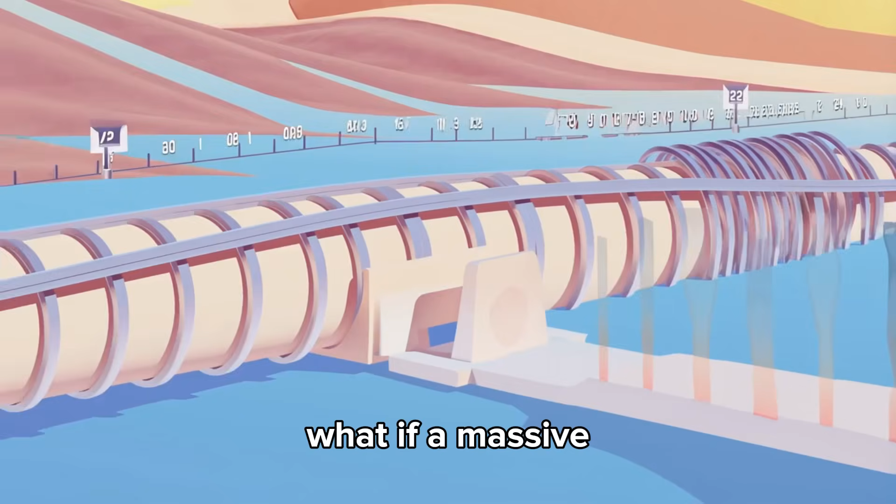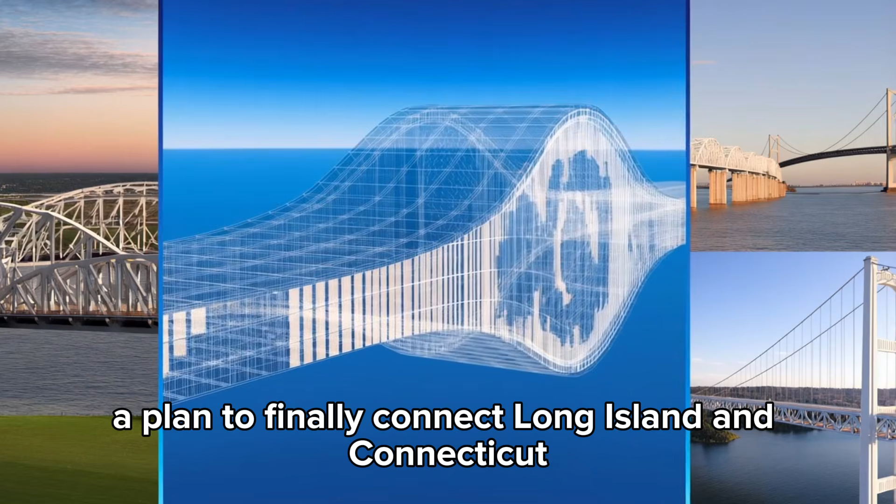What if a massive, $55 billion megaproject could bridge that gap in just 15 minutes? We are talking about one of the most ambitious, controversial, and expensive infrastructure dreams in American history. A plan to finally connect Long Island and Connecticut with a masterwork of engineering that would dwarf almost any other bridge or tunnel on the planet.

This isn't just a local road project. This is a battle of logistics, gargantuan budgets, and environmental high stakes that has been simmering for nearly a century. Today we are diving deep into the blueprints, the massive engineering hurdles, and the political firestorm surrounding New York's $55 billion plan to change the face of the Northeast forever.

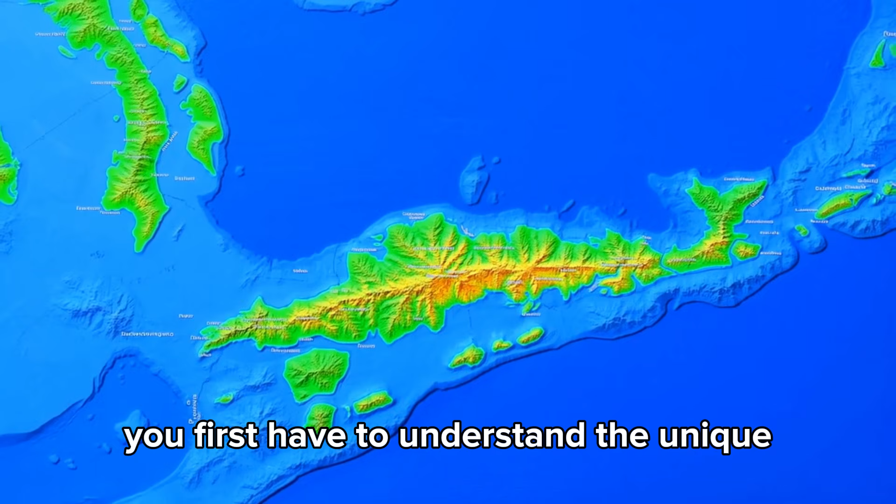To understand why this project is such a big deal, you first have to understand the unique geographical trap that is Long Island. With over 8 million residents, if Long Island were its own state, it would be the 13th most populous in the country. Yet it operates like a giant cul-de-sac. Every single piece of bread, every gallon of fuel, and every commuter trying to leave the island toward the north or east has to funnel through the bottlenecks of New York City. This creates a logistical nightmare that costs billions in lost productivity and wasted fuel every single year.

For decades, planners have looked at the Long Island Sound and seen a massive missed opportunity. They see a gap that, if closed, would bypass the entire metropolitan nightmare and create a direct corridor for trade and travel between the Mid-Atlantic and New England. The $55 billion figure isn't just a placeholder. It represents the estimated cost of a project so complex it would require technologies that push the boundaries of modern civil engineering.

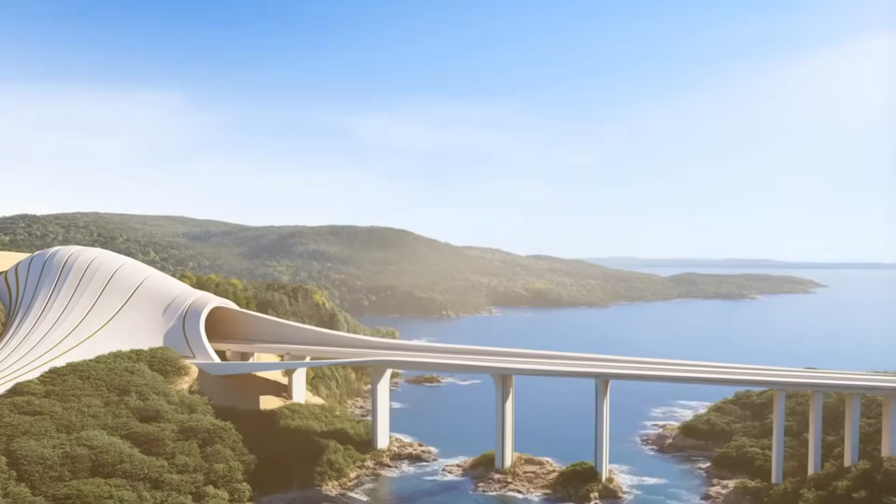There have been several proposed routes over the years, but the most prominent ones involve connecting Oyster Bay on Long Island to Rye in Westchester, or the even more ambitious eastern crossing from Wading River to New Haven. We aren't just talking about a simple bridge, because the Long Island Sound is a vital waterway for shipping and a sensitive ecological zone. A traditional bridge isn't always the best answer. A combination of massive suspension bridges and deep-sea tunnels, similar to the Chesapeake Bay Bridge Tunnel, but on a much larger and more technologically advanced scale.

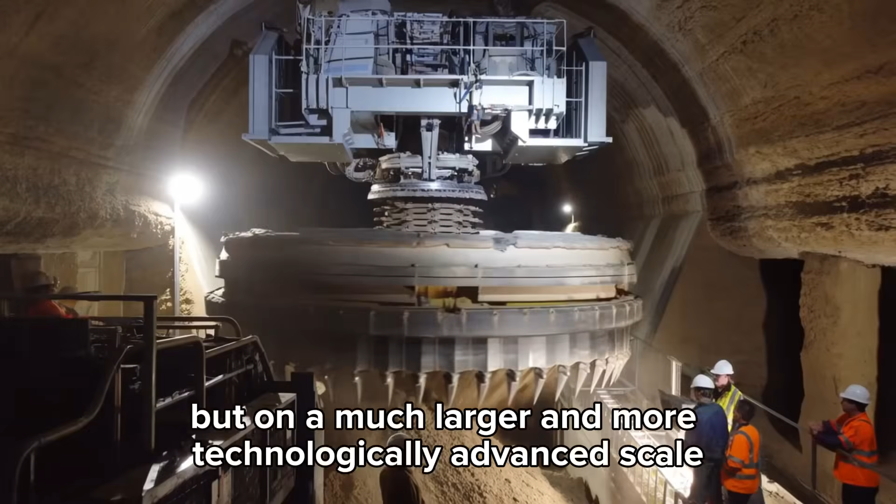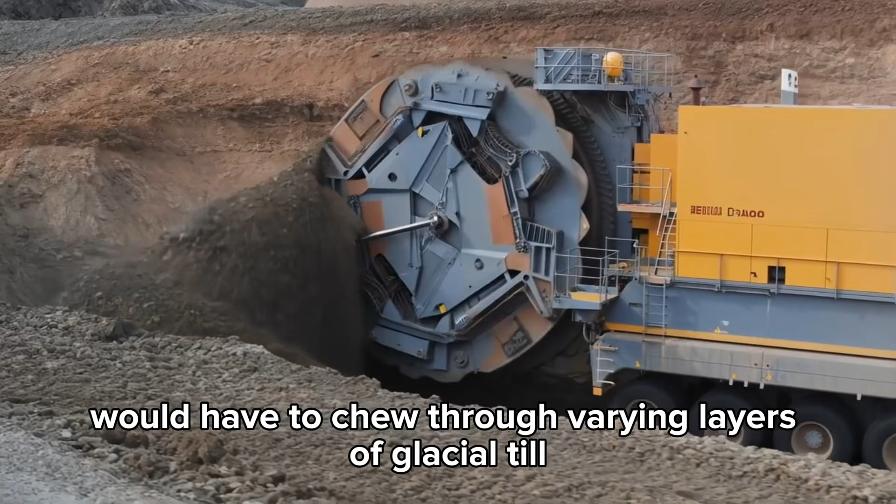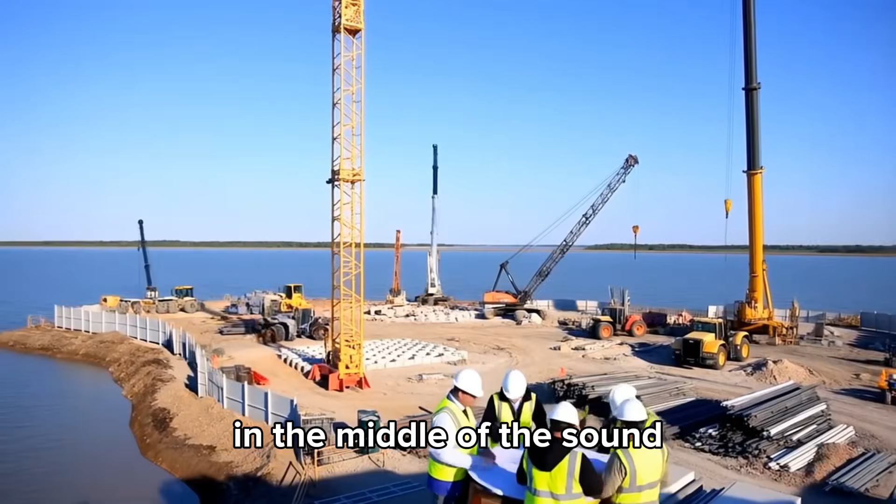This presents massive challenges for ventilation, fire safety, and emergency evacuation. Engineers would need to construct artificial islands in the middle of the sound to serve as ventilation shafts and staging areas, creating entirely new landmasses in the process.

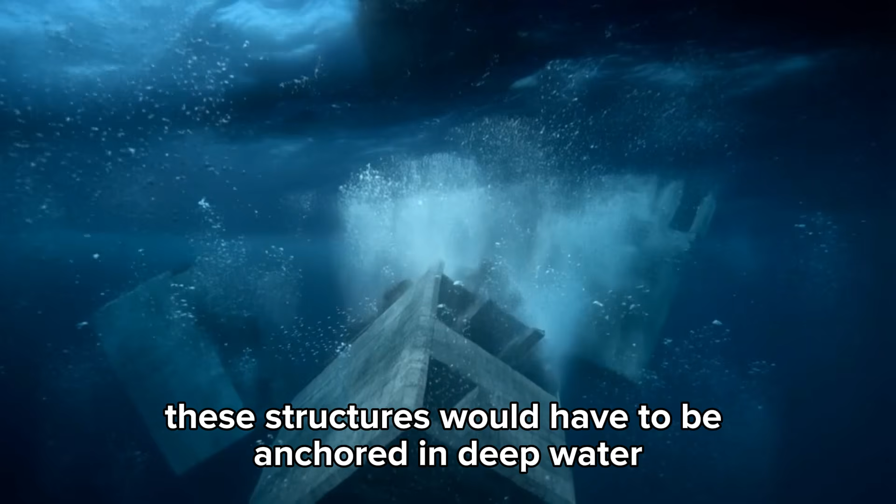The bridge sections would be equally staggering. To allow for the passage of massive cargo ships and military vessels, the spans would need to be incredibly high and wide. We are talking about suspension towers that could rival the height of New York City skyscrapers. These structures would have to be anchored in deep water, requiring massive caissons to be sunk into the seabed, a process that is both incredibly expensive and technically risky. The environmental impact of placing these massive pillars in a tidal estuary is one of the primary reasons the project has faced such fierce opposition from conservation groups.

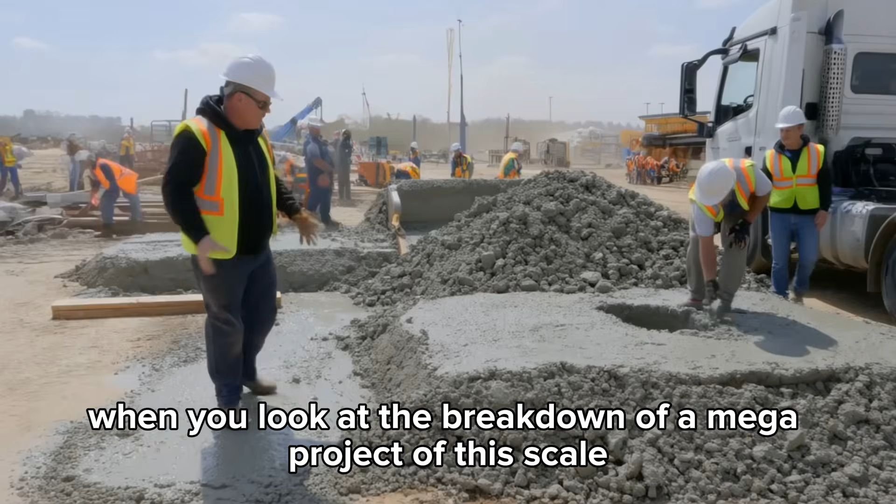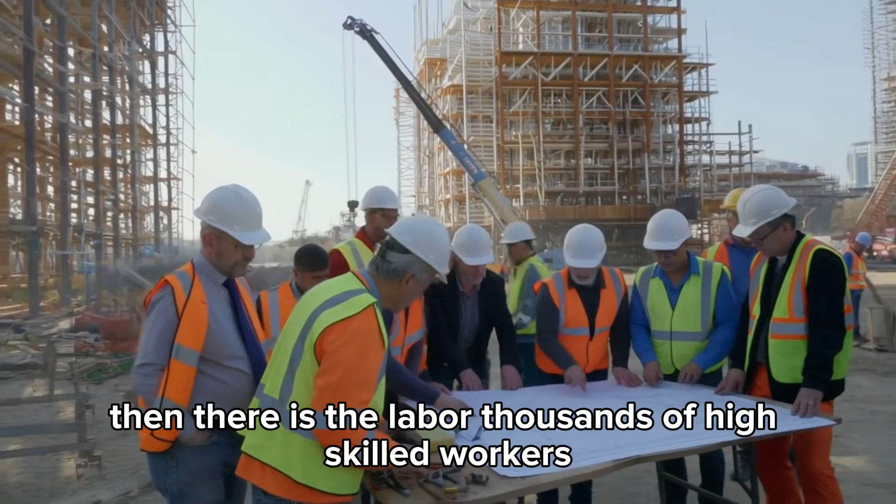But why $55 billion? When you look at the breakdown of a megaproject of this scale, the costs start to spiral quickly. First, you have the raw materials, millions of tons of high-performance concrete and specialized structural steel. Then there is the labor, thousands of high-skilled workers, engineers, and divers working in hazardous conditions for over a decade. But a huge chunk of that budget actually goes toward land acquisition and environmental mitigation. Long Island and coastal Connecticut are home to some of the most expensive real estate in the world.

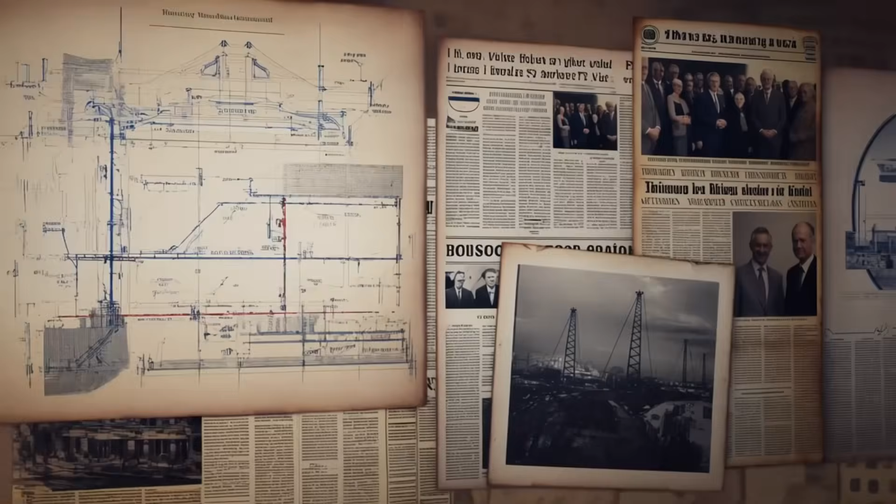Buying the rights of way to connect the bridge or tunnel to existing highways means moving through wealthy suburbs where a single acre can cost millions. The political history of this project is a roller coaster of grand visions and crushing defeats.

The dream started in earnest with Robert Moses, the legendary and polarizing master builder of New York. Moses wanted a bridge across the Sound to complete his vision of an interconnected highway system. In the 1960s and 70s, he pushed hard for an Oyster Bay Rye Bridge. He saw it as the final piece of the puzzle.

However, he met his match in a coalition of local residents and environmentalists who didn't want a massive highway cutting through their quiet, wealthy neighborhoods. This was one of the few times Moses actually lost a fight, and the project was shelved for decades. Fast forward to the 21st century, and the traffic problem has only worsened.

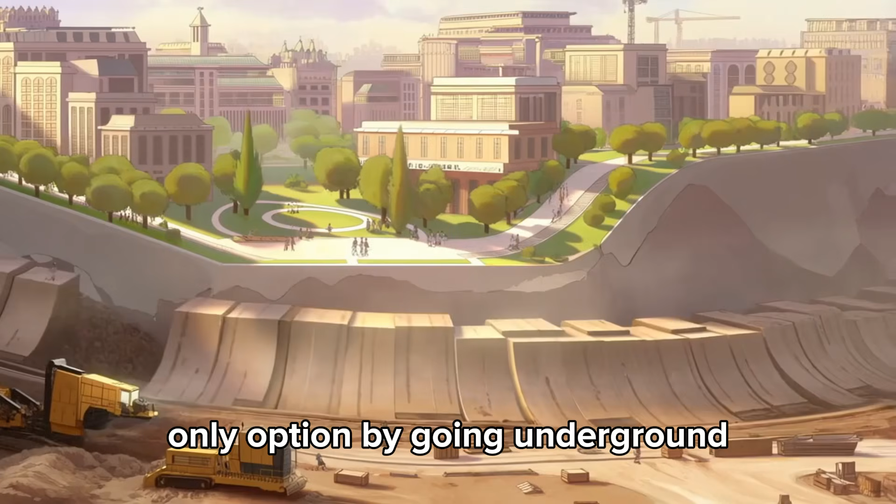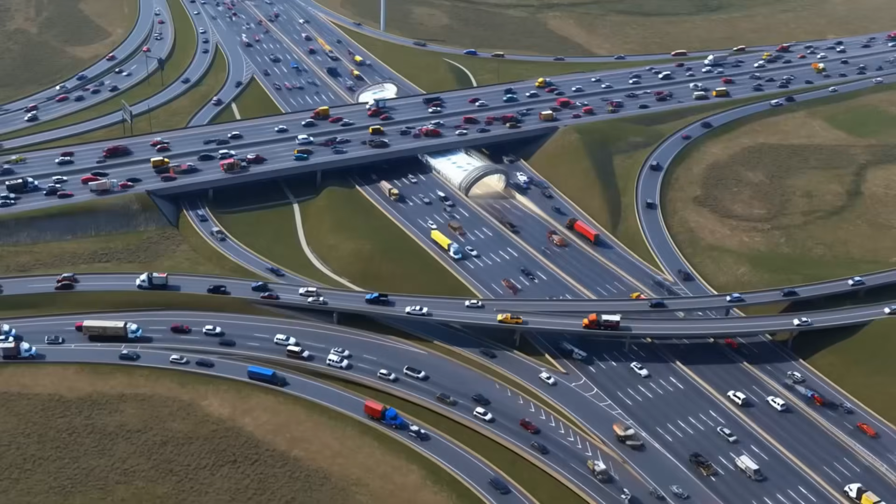The idea was revived by former Governor Andrew Cuomo, who commissioned new studies to look at the feasibility of a tunnel-only option. By going underground, planners hoped to avoid the aesthetic and noise complaints that killed the bridge proposals of the past. A tunnel would effectively be invisible to the residents on the shores, appearing only as a portal several miles inland near major existing highways like the Long Island Expressway and I-95.

But the price tag for a tunnel is nearly double that of a bridge, leading us to that astronomical $55 billion estimate. Let's look at the logistical benefits. If this link were built, it would transform the entire regional economy.

Currently, a truck traveling from a warehouse in central Long Island to a store in Boston has to fight through the Cross Bronx Expressway, arguably the most congested road in America. With a Sound crossing, that truck could bypass New York City entirely, shaving hours off the trip. This would lead to lower shipping costs, fresher produce, and a more resilient supply chain.

For the millions of people living on the island, it would mean the freedom to travel north without checking a traffic app 3 hours in advance. It would turn Long Island from a dead end into a gateway. However, the criticisms are just as massive as the project itself.

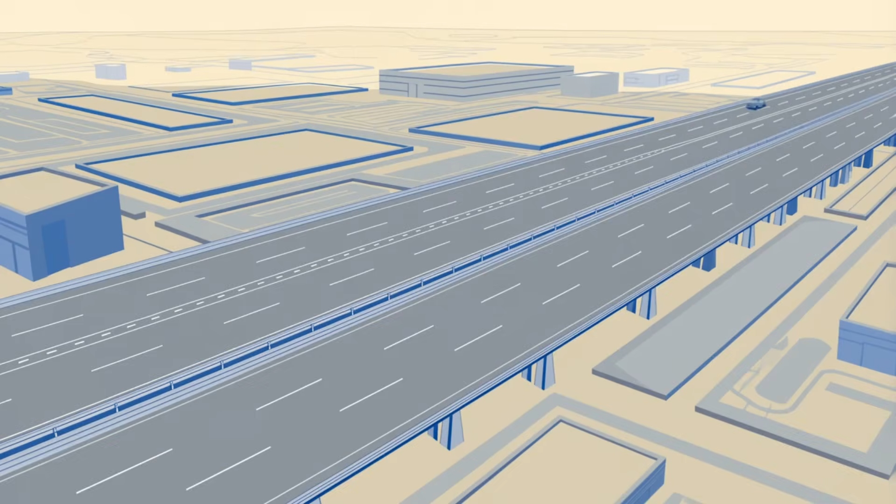Beyond the cost, many urban planners argue that building more highways only leads to induced demand. This is the idea that if you build more lanes, more people will choose to drive. And within a few years, the new bridge will be just as congested as the old routes.

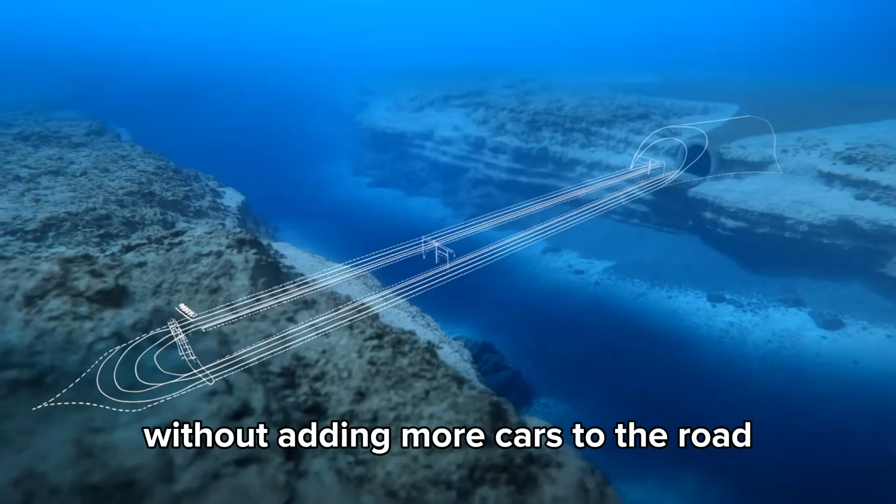Critics suggest that the $55 billion would be better spent on massive upgrades to the Long Island Railroad and the Metro North, creating a high-speed rail link that could move people across the Sound without adding more cars to the road. There has even been talk of a rail-only tunnel, which would be smaller and cheaper, but would still bridge the geographical gap. Then there is the environmental perspective.

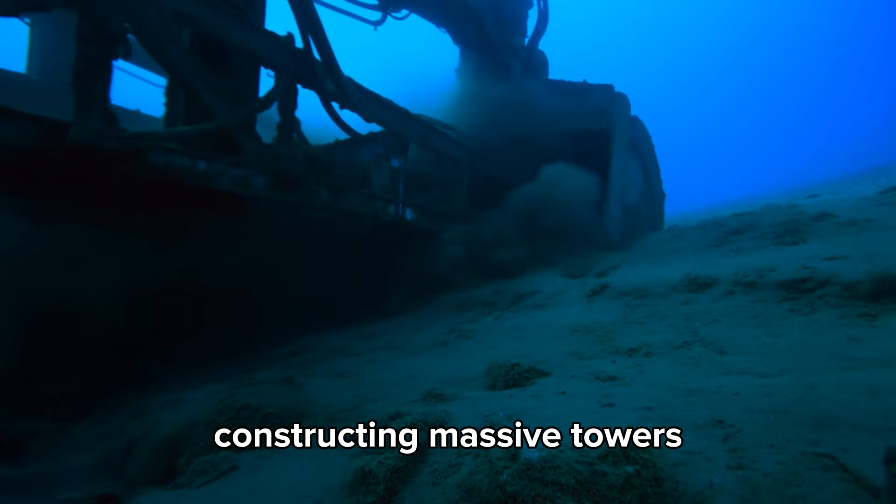The Long Island Sound is a unique ecosystem, home to diverse marine life and vital for local fishing and recreation. Constructing massive towers or digging deep tunnels would stir up decades of sediment, potentially releasing pollutants into the water column. The artificial islands required for ventilation could alter tidal currents and impact the migration patterns of fish and birds.

For many who live on the Sound, the water isn't just a barrier to be crossed, it's a sanctuary to be protected. This cultural clash between those who want progress and those who want preservation is the core reason the project remains in a state of perpetual planning.

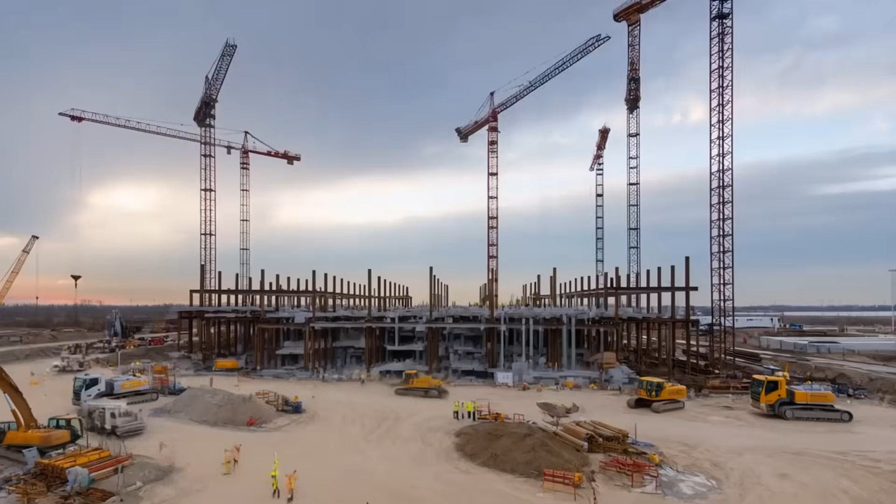But imagine for a moment that the project gets the green light. The construction phase would be one of the greatest engineering spectacles on Earth. We would see a fleet of specialized barges, floating factories capable of mixing concrete on-site, and giant cranes that can lift entire bridge sections into place.

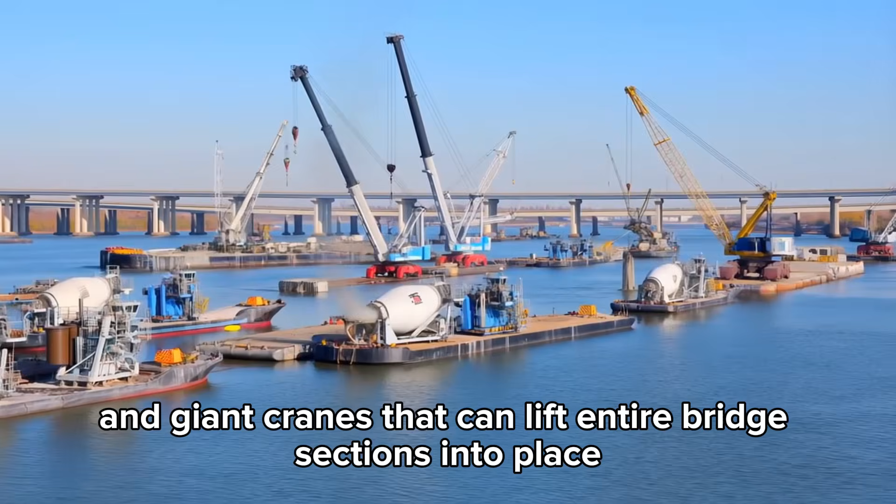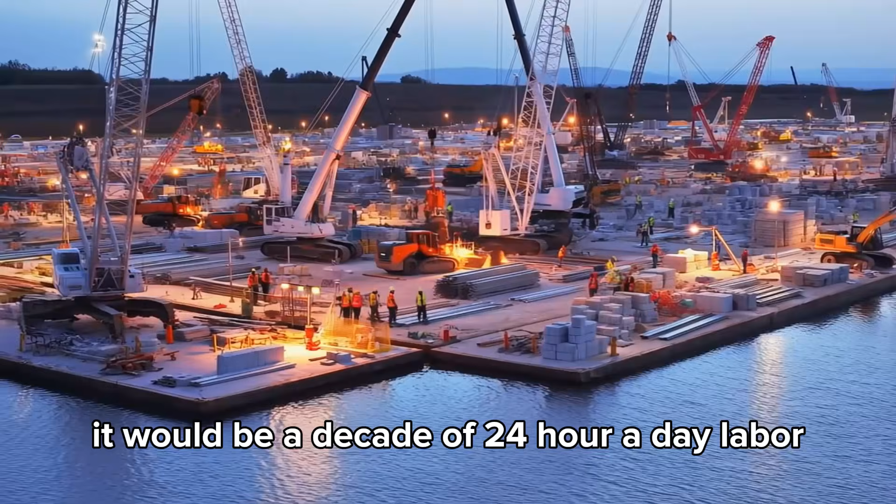The tunnel boring machines would be custom-built monsters, designed specifically for the unique geology of the Sound. It would be a decade of 24-hour-a-day labor, creating a temporary city of workers and industrial equipment on the water. The project would also require a massive redesign of the regional power grid.

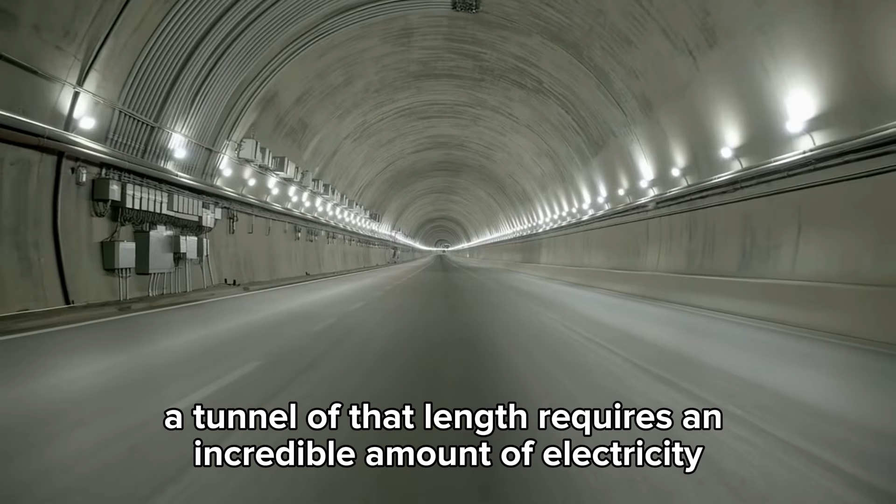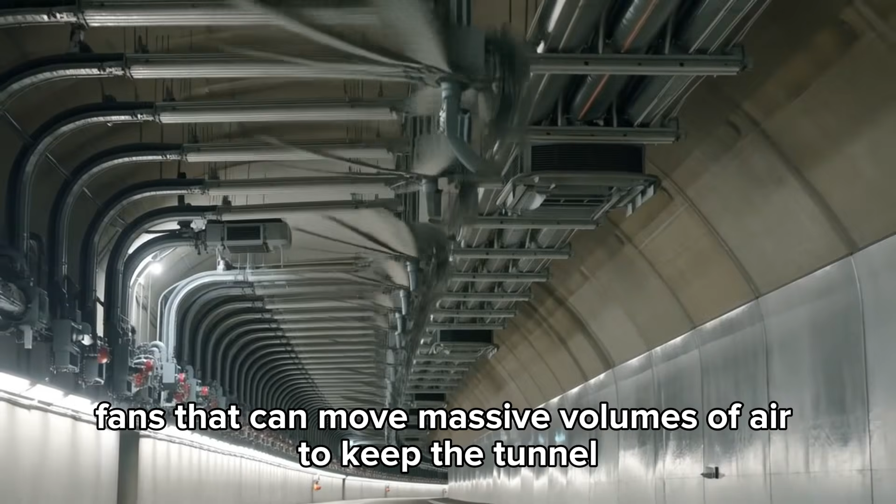A tunnel of that length requires an incredible amount of electricity for lighting, pumping systems to remove water, and most importantly, ventilation fans that can move massive volumes of air to keep the tunnel safe for drivers. Designers would likely need to build dedicated power substations just to handle the load of the crossing.

There is even a proposal to include high-voltage transmission lines and fiber-optic cables within the bridge or tunnel structure, making it a vital piece of energy and data infrastructure as well as a road.

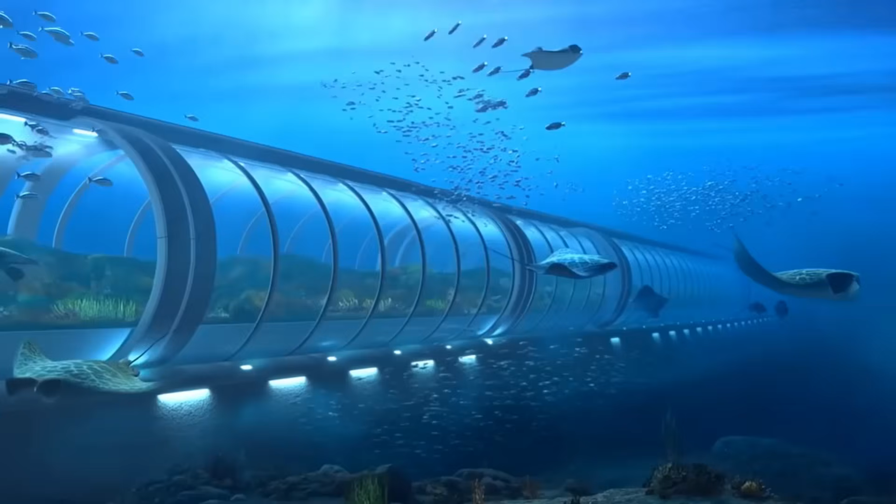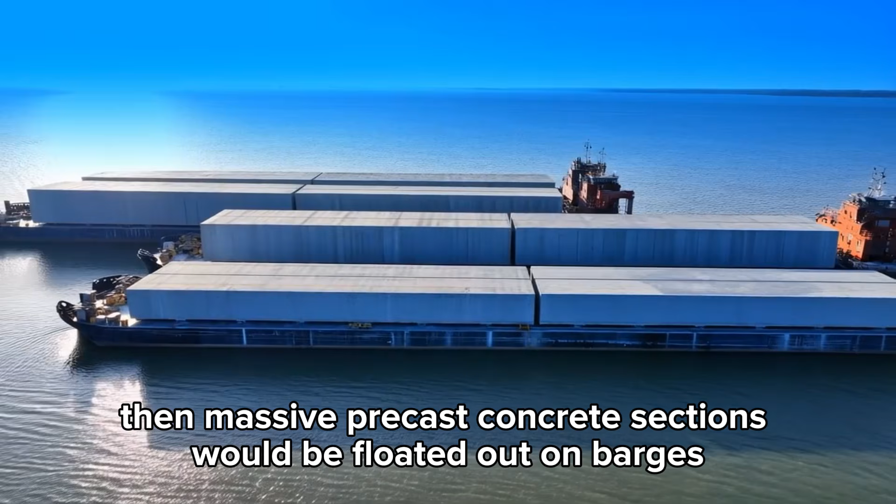One of the most fascinating engineering options being discussed is an immersed tube tunnel. Instead of boring through the rock, builders would dredge a trench on the seafloor. Then, massive precast concrete sections would be floated out on barges, sunk into the trench, and joined together underwater. This is the method used for many of the world's most successful underwater crossings.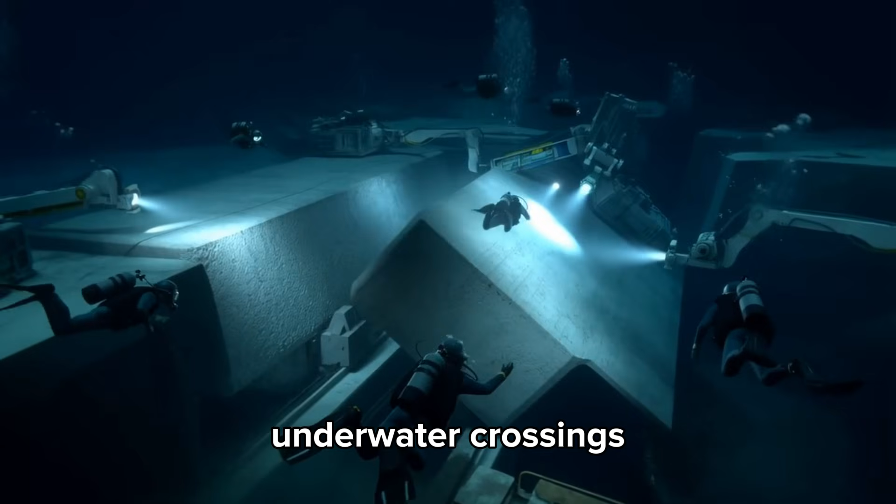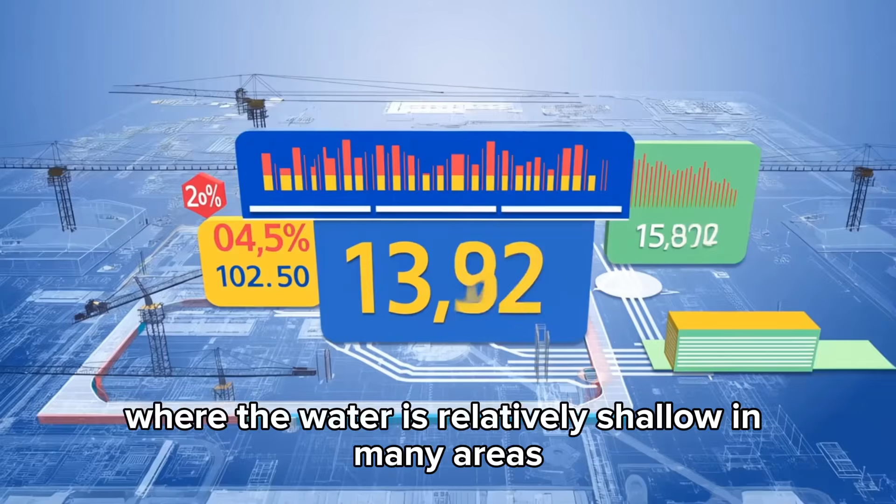It can be faster and sometimes cheaper than boring, but it is highly disruptive to the seabed. In a place like the Long Island Sound, where the water is relatively shallow in many areas, this could be a viable, albeit controversial, option.

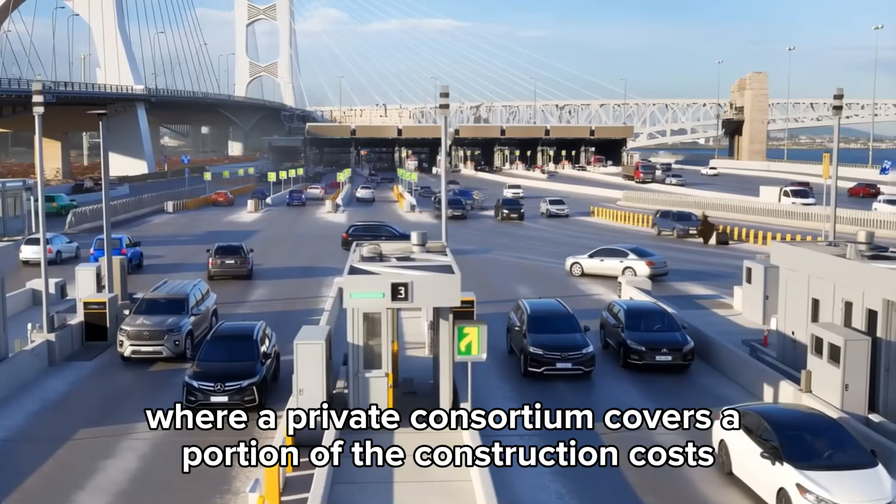The financial side of the $55 billion is a mega project of its own. How do you pay for a bridge that costs more than the annual budget of some countries? The most likely scenario is a public-private partnership, where a private consortium covers a portion of the construction costs in exchange for the rights to collect tolls for 30 or 50 years.

Given the high volume of traffic, the tolls would be significant, likely exceeding $50 or even $100 for a round trip. While that sounds expensive, for a trucking company saving 4 hours of time and fuel, it's a bargain. The project would become a massive cash flow engine, eventually paying for itself over several decades.

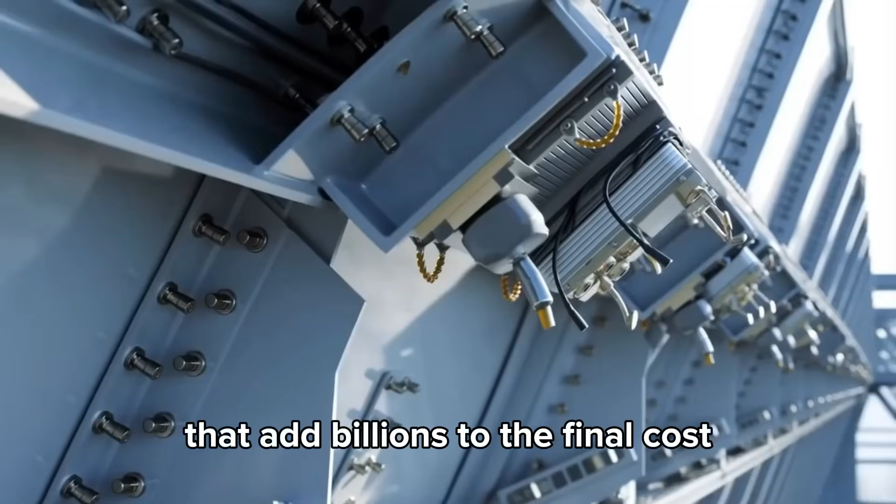A link of this importance would be a critical piece of national infrastructure. It would require state-of-the-art surveillance, blast-resistant designs, and a dedicated security force to monitor the crossing 24 hours a day. In the post-9/11 world, building a mega-project in the New York metropolitan area comes with a massive layer of security requirements that add billions to the final cost. Every inch of the structure would be monitored by sensors designed to detect everything from structural shifts to unauthorized intruders.

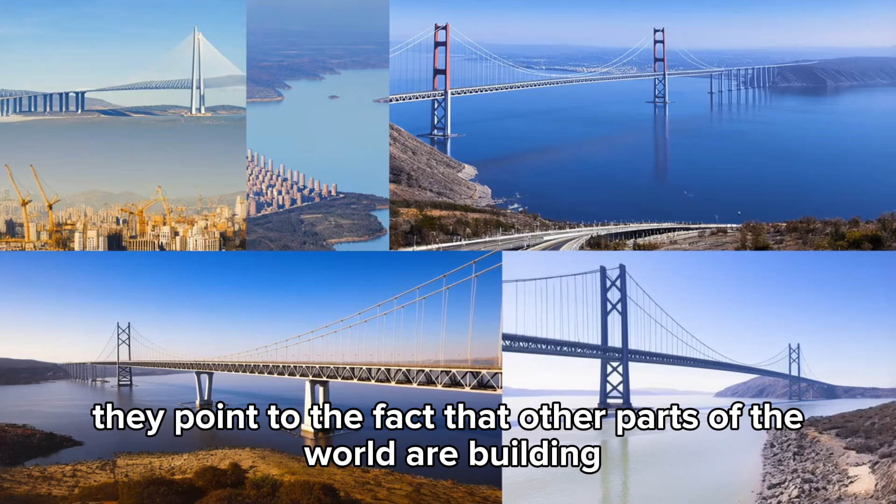As we look at the current state of the plan, it remains a dream on paper, but a dream that refuses to die. Every few years, as traffic on the Throgs Neck and Whitestone bridges reaches a breaking point, a new politician or business group brings up the sound crossing. They point to the fact that other parts of the world are building even longer and deeper crossings. China, for instance, has completed several projects of this scale in the last decade. Proponents ask why the United States, and specifically the wealthiest region in the country, can't manage to build a vital link that has been needed for 80 years.

The opposition, however, is equally persistent. They argue that the era of massive highway projects is over. They point to the need for climate-resilient infrastructure and the push toward green energy. They ask if we should really be spending $55 billion to encourage more gas-powered vehicles to drive more miles. This debate isn't just about a bridge. It's about the future of how we live and move in the Northeast. Is our future one of more roads and cars? Or is it one of high-speed rail and reduced carbon footprints?

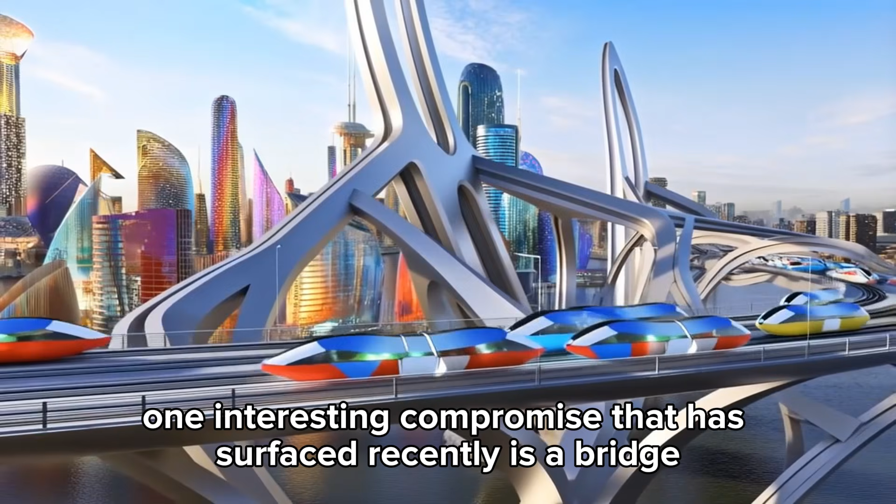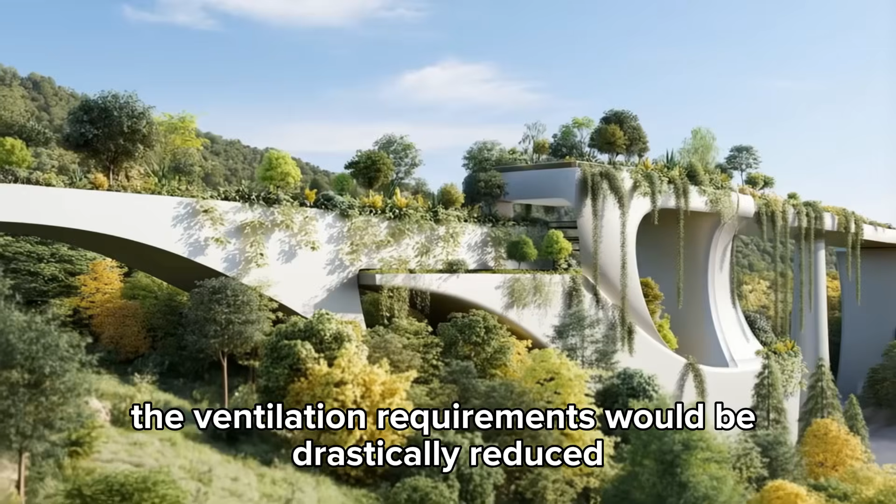One interesting compromise that has surfaced recently is a bridge or tunnel that is strictly for rail and autonomous electric shuttles. This would reduce the size and cost of the crossing while still providing a high-capacity link for people and goods. By banning traditional combustion engine trucks and cars, the ventilation requirements would be drastically reduced, and the environmental impact could be minimized. This high-tech vision for the sound crossing could be the key to winning over some of the project's skeptics.

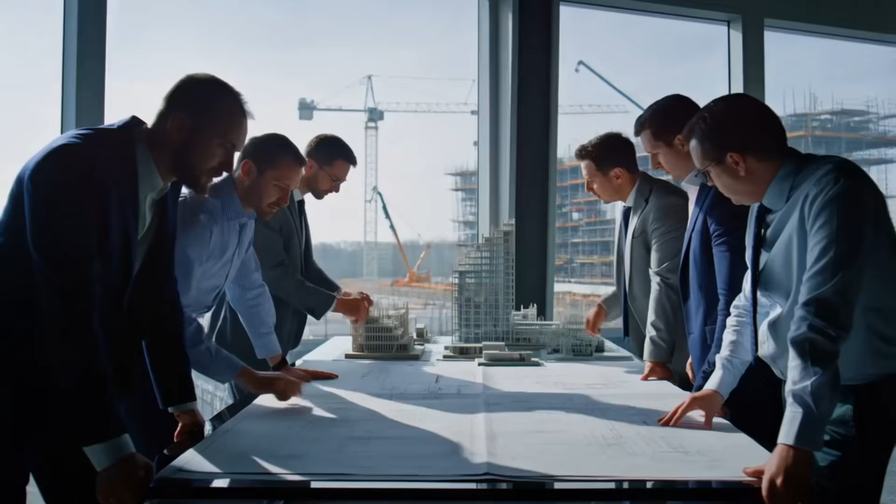But let's not forget the sheer human scale of the people involved. For a commuter on Long Island, this project represents the hope of getting home in time to see their kids' soccer game instead of sitting in gridlock on the Long Island Expressway. For a business owner in Connecticut, it means access to a massive new pool of customers and workers. For the engineers, it's the challenge of a lifetime, a chance to build a monument that will last for a century. Infrastructure is at its heart about the people it serves.

The engineering hurdles are matched by the bureaucratic ones. A project like this would require approvals from dozens of local, state, and federal agencies. It would involve the Army Corps of Engineers, the Environmental Protection Agency, the Coast Guard, and the Departments of Transportation for 2 different states.

Navigating this labyrinth of regulations can take as long as the construction itself. This soft cost of planning and permitting is a major contributor to the $55 billion price tag. Each year of delay adds hundreds of millions in inflationary costs for materials and labor.

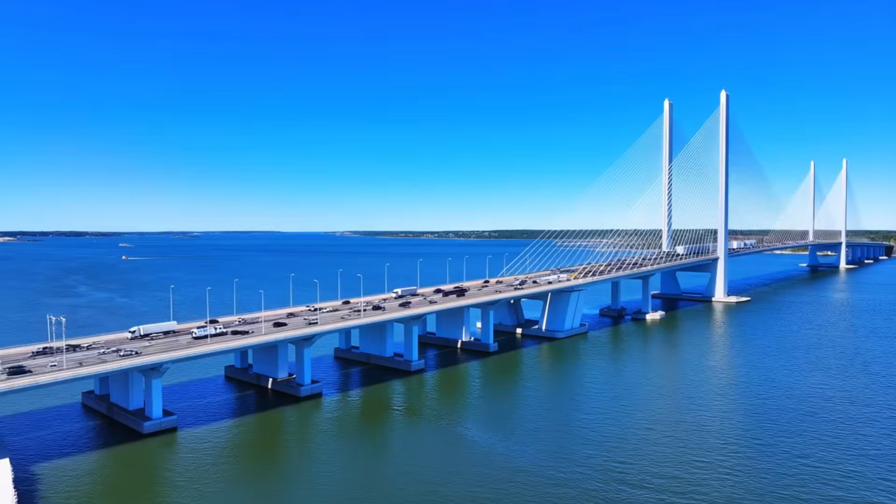When you compare the Long Island Sound crossing to other global megaprojects, the scale becomes even clearer. The Channel Tunnel connecting the UK and France was a similar feat of engineering and finance, and it has fundamentally changed the relationship between those two regions. The Øresund Bridge between Denmark and Sweden created a single integrated economic zone where 2 separate regions once existed.

Proponents of the New York-Connecticut link argue that the Long Island Sound is currently a moat that divides 2 economies that should be one. By building the crossing, we would be creating a Northeast megalopolis that is more efficient and competitive on a global scale.

Let's imagine the view from the top of the bridge portion of this project. You would be hundreds of feet above the water, looking out over one of the most beautiful coastlines in the world. To the west, the skyline of Manhattan might be visible on a clear day. To the east, the endless Atlantic. It would be an architectural icon, a landmark that would be recognized around the world. Something that New Yorkers can be proud of, similar to the Brooklyn Bridge or the George Washington Bridge.

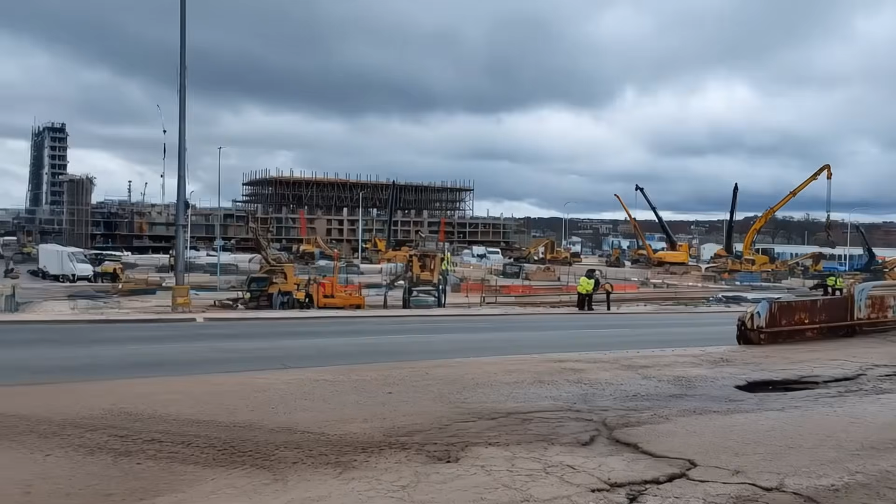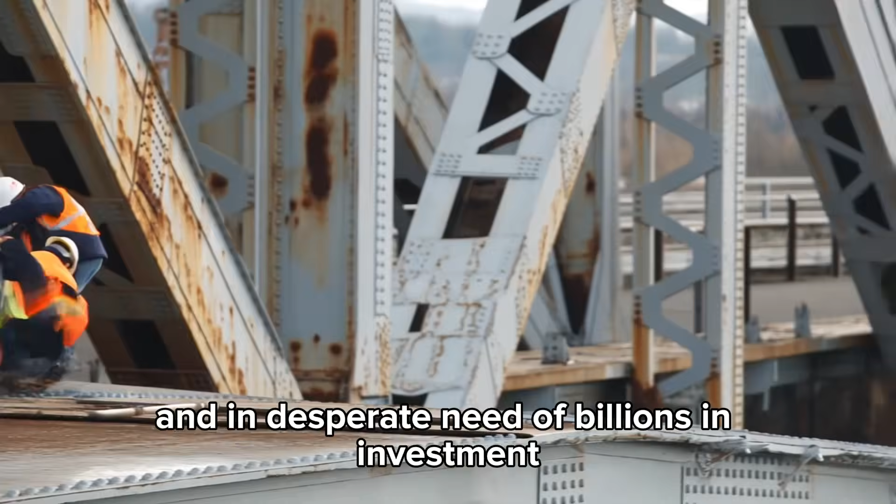But the reality of $55 billion also means that the project could suck all the oxygen out of the room for other necessary repairs. New York City's subways are over a century old and in desperate need of billions in investment. The bridges and tunnels that already exist are aging and require constant maintenance. Critics wonder if we can afford to build a shiny new toy when the old ones are falling apart. It's a classic dilemma of infrastructure investment: the tension between maintaining the past and building the future.

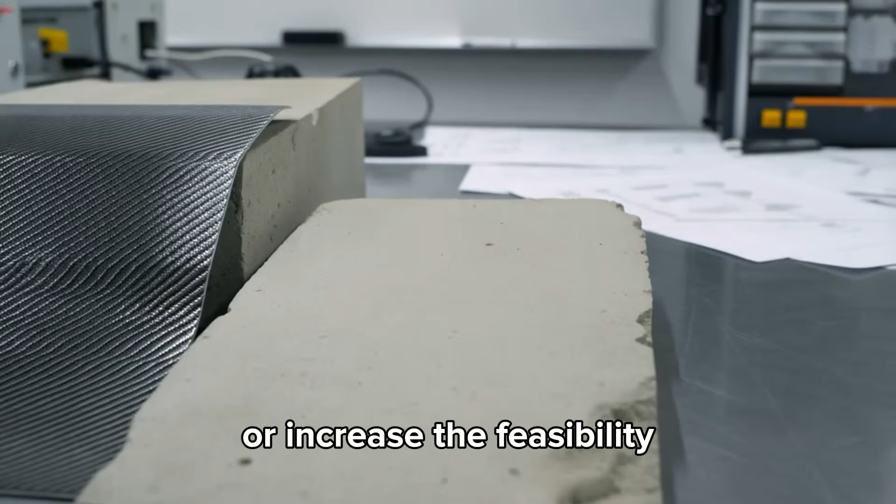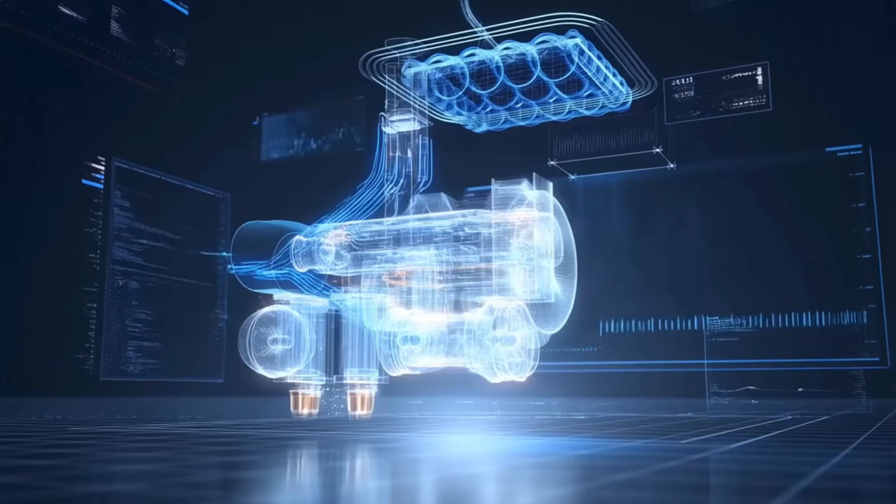Recent technological advancements might actually help lower the cost or increase the feasibility. New types of ultra-high-performance concrete and carbon fiber reinforced polymers could allow for longer spans with less material. Autonomous underwater vehicles can now perform inspections and some construction tasks that used to require human divers in dangerous conditions. Advanced AI can optimize the design of the tunnel's ventilation system to be more efficient. While the project is decades old in concept, the version built today would be a marvel of 21st century tech.

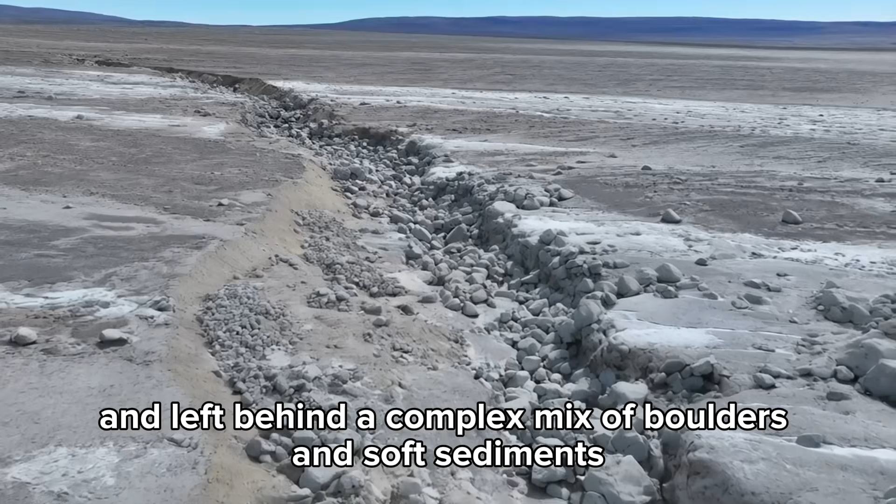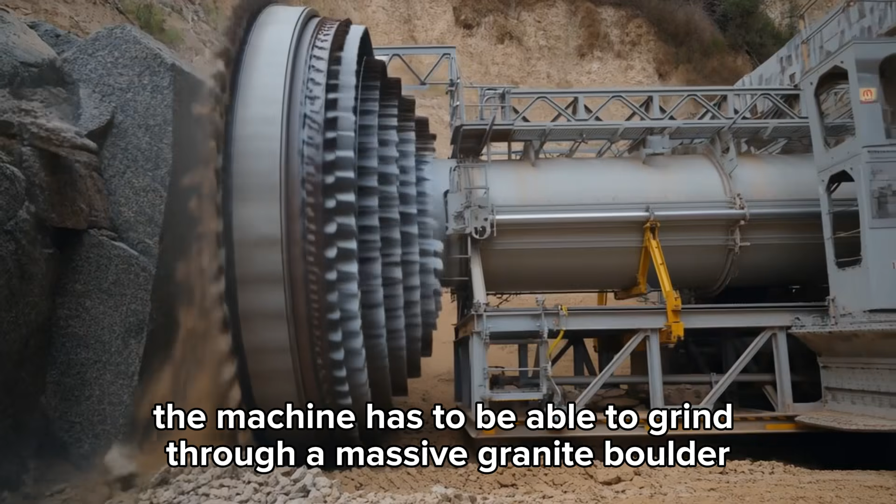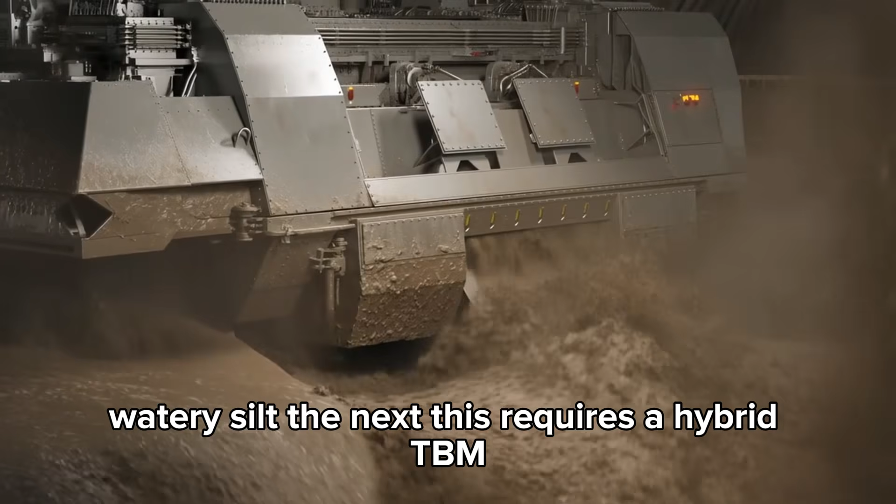The geology of the Sound is a story of the last ice age. Glaciers carved out the trench and left behind a complex mix of boulders and soft sediments. This makes the seabed a mixed face for tunneling, which is the most difficult situation for a tunnel boring machine. The machine has to be able to grind through a massive granite boulder 1 minute, and then navigate through soft, watery silt the next. This requires a hybrid TBM, a machine that can change its operating mode on the fly. Only a handful of these exist in the world, and they are custom-made for each project.

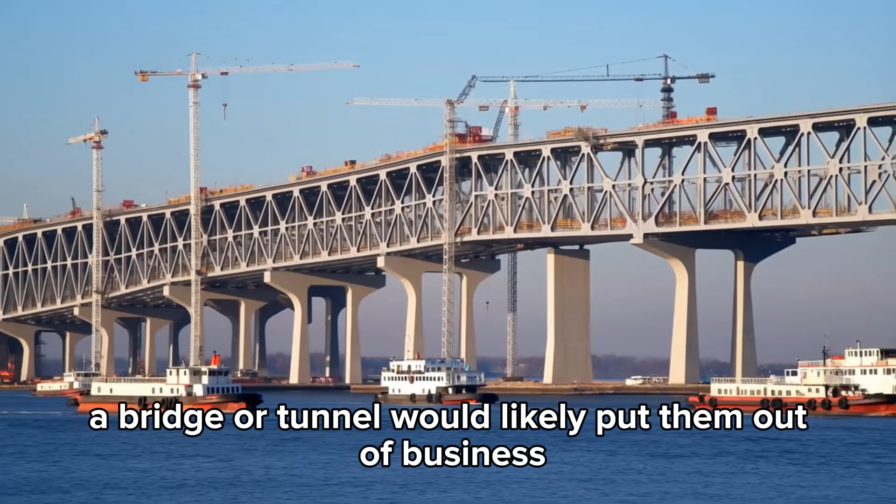Another factor to consider is the impact on the existing ferry services. The Bridgeport-Port Jefferson Ferry and the Cross Sound Ferry have been the primary links for generations. These companies are vital local employers and part of the coastal culture. A bridge or tunnel would likely put them out of business. This adds another layer of local economic concern and political resistance. Any plan for a fixed link would need to consider how to transition these workers and companies into the new regional transportation system.

As we look at the $55 billion plan, we have to recognize that the price of doing nothing is also incredibly high. Every year that passes without a solution adds to the cost of congestion, pollution, and lost economic opportunity. If we don't build a link, the traffic on the existing bridges will eventually reach a point of total failure, where the region's economy begins to contract because it simply cannot move people and goods efficiently. The do-nothing option isn't free. Its cost is just hidden in higher grocery prices and longer commutes.

This is a project that tests our collective will. Do we still have the ability to build big things in the United States? The interstate highway system and the great dams of the mid-20th century were built with a sense of national purpose. Today, our projects are often bogged down in years of litigation and political infighting.

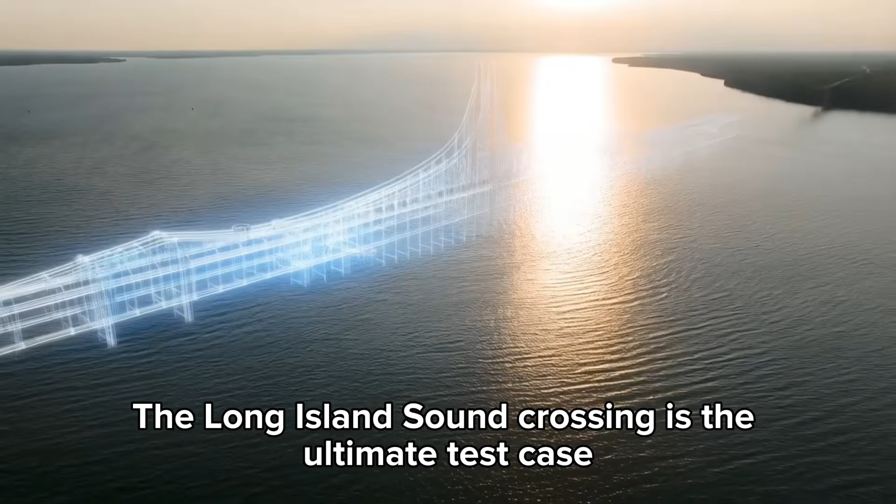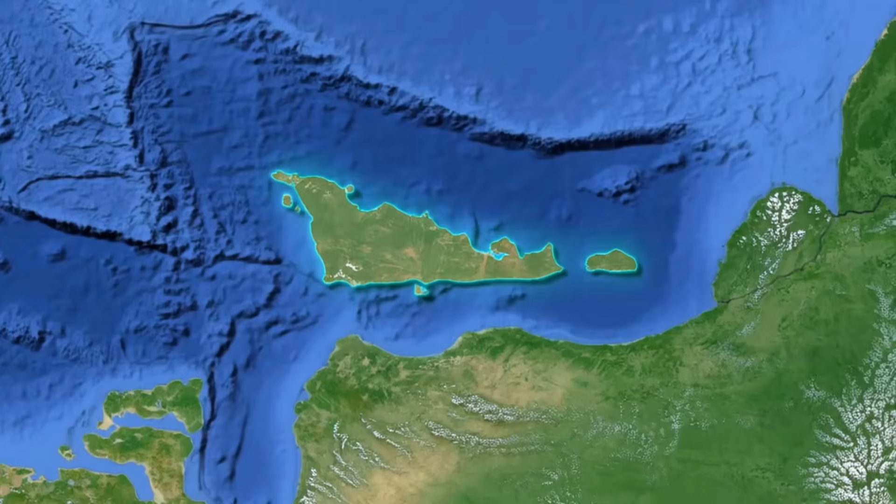The Long Island Sound crossing is the ultimate test case for whether we can still execute a vision of this magnitude. The project also has implications for disaster recovery. If a major storm or incident were to take out one of the major bridges in New York City, Long Island would be almost completely cut off from the rest of the continent. A crossing at the eastern end, or even in the middle of the Sound, provides a vital redundancy, a plan B for the region's survival. This aspect of national security and regional resilience is often a key argument used by those pushing for the federal government to step in and provide funding.

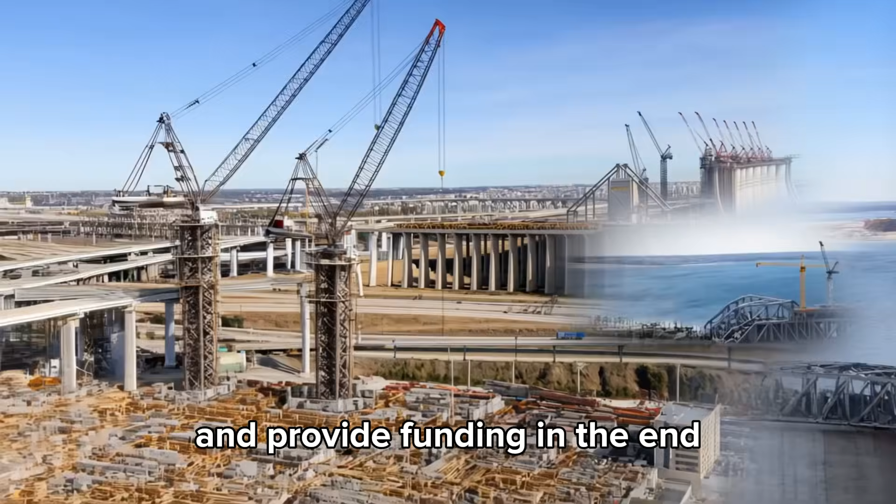In the end, the $55 billion plan to connect Long Island and Connecticut remains one of the most fascinating what-ifs in the world of megaprojects. It sits at the intersection of engineering genius, economic necessity, and intense social and environmental debate. Whether it is ever built or remains a blueprint in a dusty office in Albany, it represents the scale of the challenges we face in our aging, crowded metropolitan areas. It's a dream of a 15-minute trip across a blue expanse, a dream of bypassing the gridlock, and a dream of finally finishing the work that Moses started nearly a century ago.

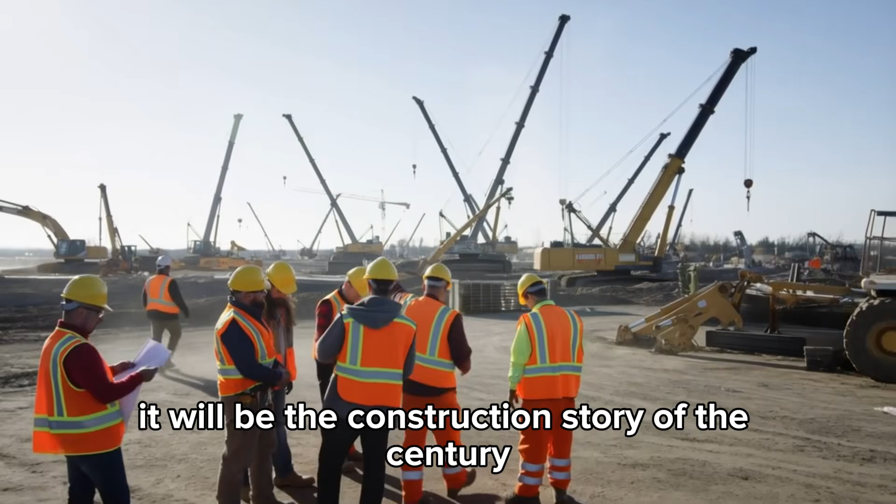If the project ever moves forward, it will be the construction story of the century. The world's eyes would be on the Sound, watching as the towers rise and the machines burrow deep. It would be a testament to our desire to overcome the barriers of geography and to connect our communities more closely. For now, the ferry still sails, the bridge traffic still crawls, and the dream of the Sound crossing waits for the right moment, the right leader, and the right $55 billion.

The Long Island Sound is a quiet place at night. The water is calm, and the lights of the distant shore twinkle. It's hard to imagine the sheer industrial power that would be required to span this gap. But when you're sitting in the third hour of a traffic jam in the Bronx, trying to get home to Long Island on a Friday night, that massive engineering project doesn't seem like a luxury or an environmental threat. It seems like the only logical solution to a problem that has outgrown our current infrastructure.

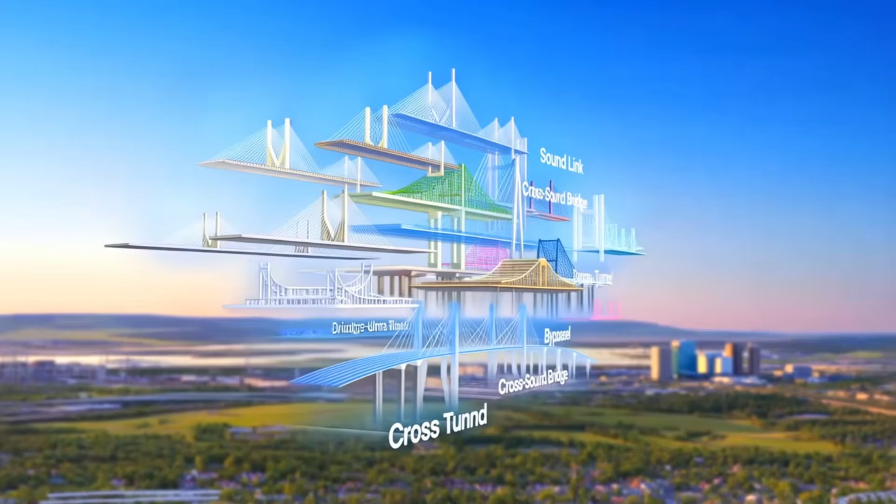As we continue to monitor the progress of New York's regional planning, the Sound crossing will always be the elephant in the room. It's the one project that could truly solve the island's isolation. Whether it's called a Sound Link, a cross-Sound bridge, or a bypass tunnel, the core mission remains the same: to break the geographical trap and open a new chapter for the Northeast. It's a $55 billion question that New York and Connecticut will eventually have to answer. The engineering world is ready. The technology is there. The economic case is stronger than ever. All that remains is the political courage and the public consensus to take the leap and build into the blue.

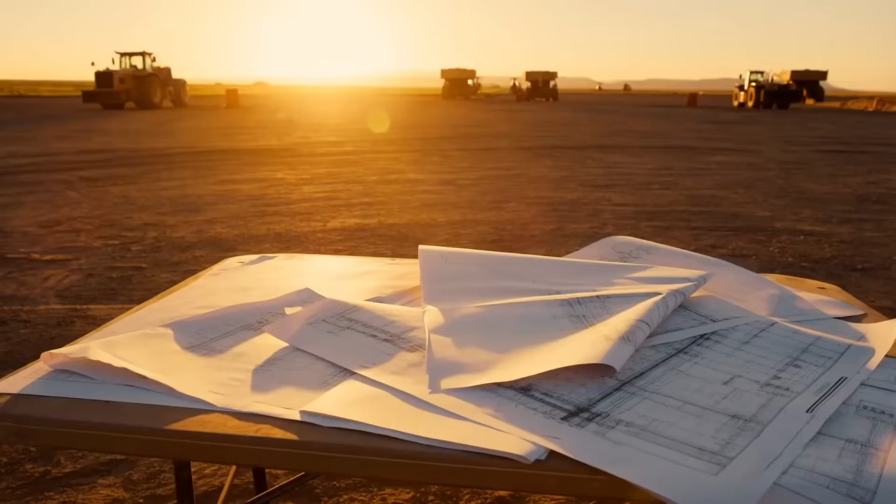Until then, keep an eye on the horizons of Oyster Bay and New Haven. One day you might see the first barges arrive, signaled by the arrival of the most ambitious megaproject in a generation. The Long Island Connecticut link is a journey that began 100 years ago and is still searching for its destination. This project reminds us that the world is built by those who dare to propose the impossible. Even if this specific $55 billion plan never breaks ground, the ideas it generates and the engineering solutions it proposes will influence the next generation of builders. Every study conducted and every model built prepares us for the day when we finally decide to close the gap. The Sound is a wide, beautiful barrier, but history shows that where there is a need, humans will eventually find a way to build a bridge.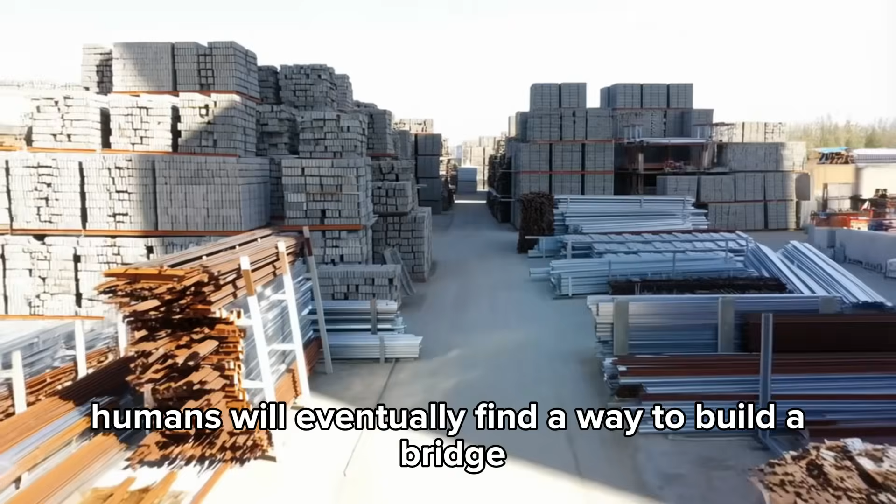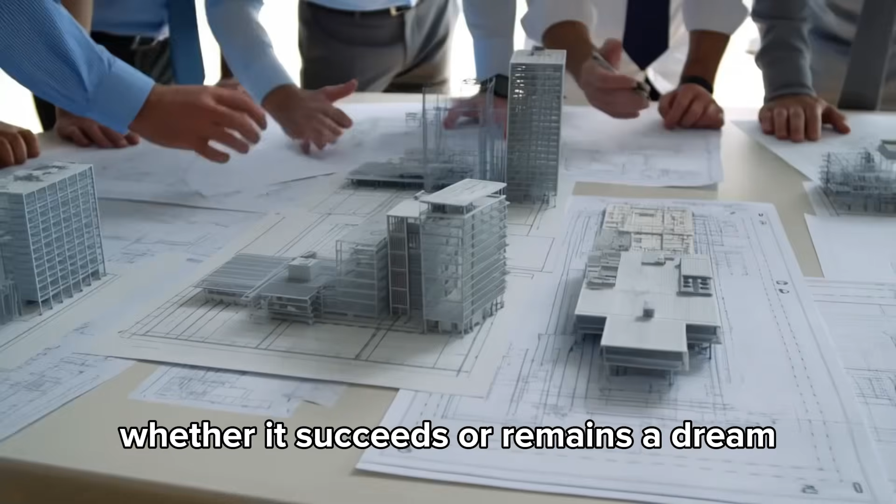Think of the sheer amount of steel and concrete that $55 billion buys. Think of the miles of tunnel and the height of the towers. Most of all, think of the change it would bring to the lives of 8 million people. It's not just about getting from point A to point B, it's about reimagining an entire region of the world. And the stakes couldn't be higher. Whether it succeeds or remains a dream, it is a megaproject in every sense of the word, a testament to our enduring desire to build something great, something lasting, and something that connects us all.